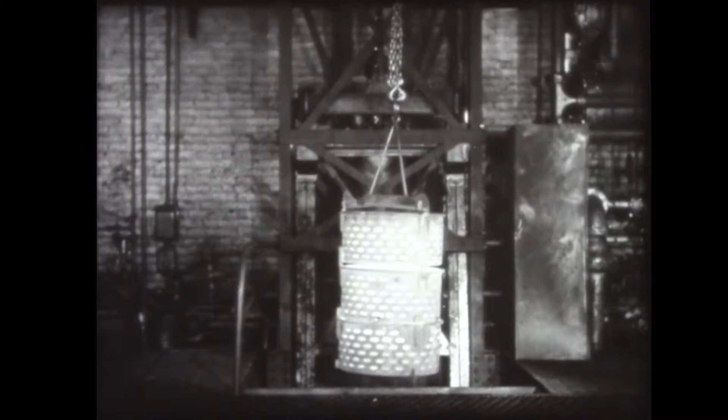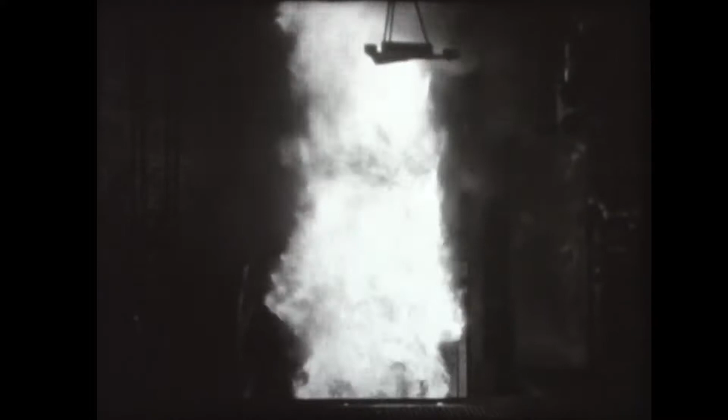Heat treatment makes possible the use of steel for a wide variety of modern industrial purposes. In the heat treating shop, specific qualities are imparted to metal parts. They can be made harder, tougher, softer, given whatever special properties are needed during their manufacture or in their eventual performance. Steel may be hardened by heating it to a high temperature, high enough to make it red hot, and cooling it rapidly.

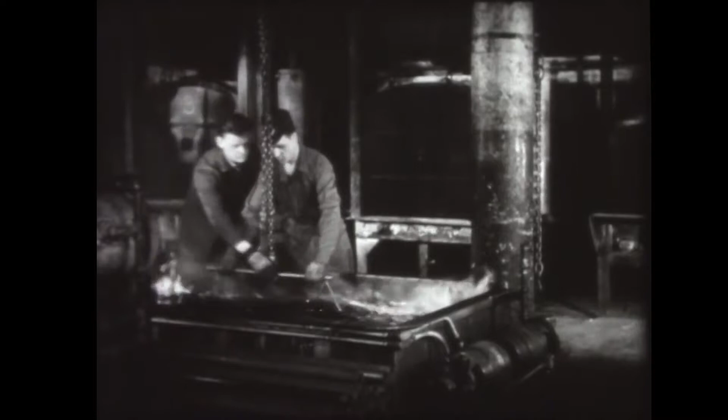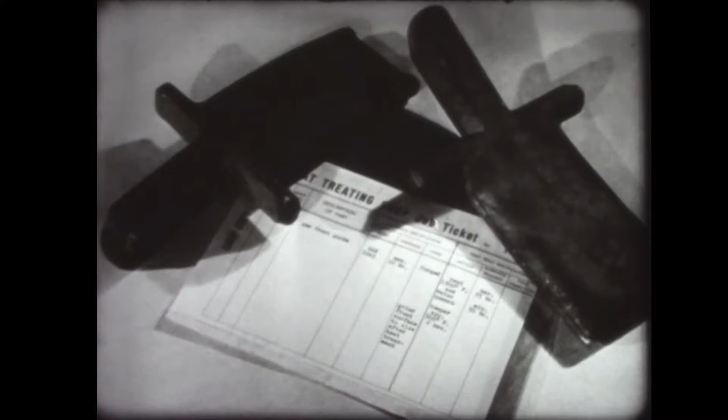Each job, each steel, has its own specifications. To take a typical case, these gun parts, called front guides, must be hard and tough to meet rigid performance demands. Heat treatment will impart the hardness required. But how hard are they now?

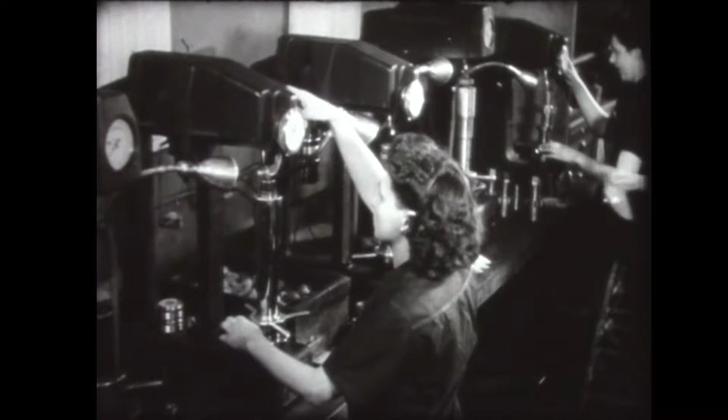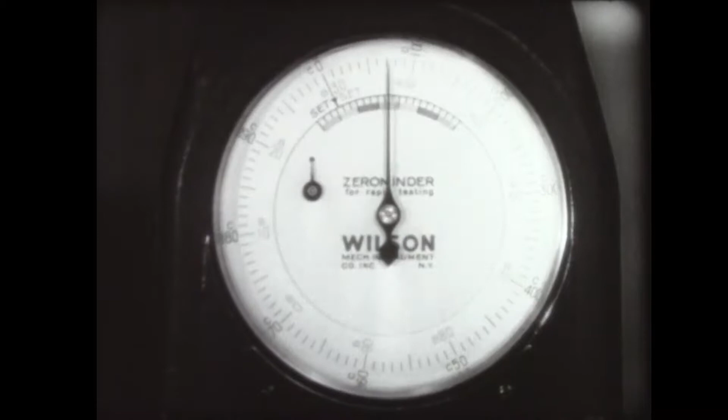The Rockwell hardness testing machine is an accurate means of finding relative hardness. The C scale of this Rockwell dial shows a reading of 10 to 11. The part under test isn't very hard. The specifications call for hardening it to Rockwell C 50 to 55.

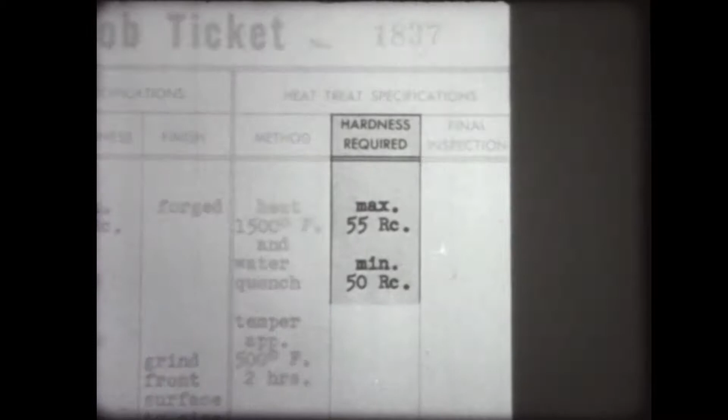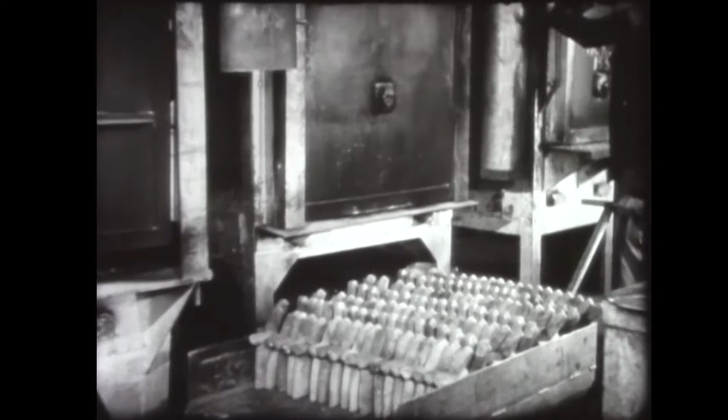These front guides are taken to the hardening furnace. Here begins the process which will bring about the desired final hardness and toughness. The guides are now the responsibility of the heat treater, who will see the job through. The furnace is charged with the parts and heated.

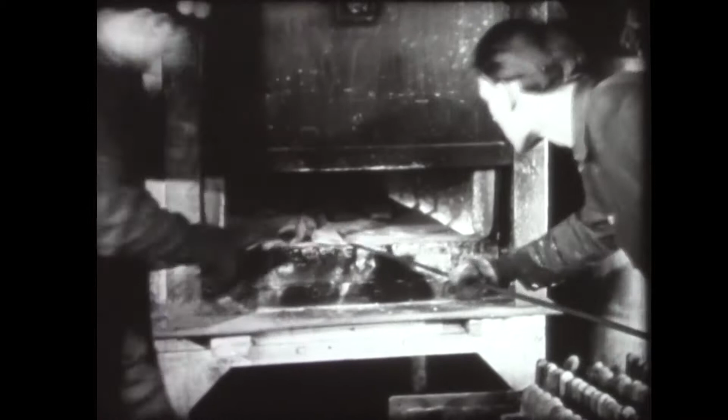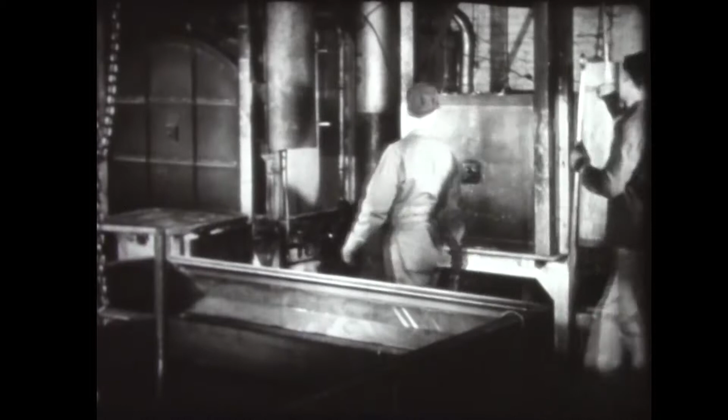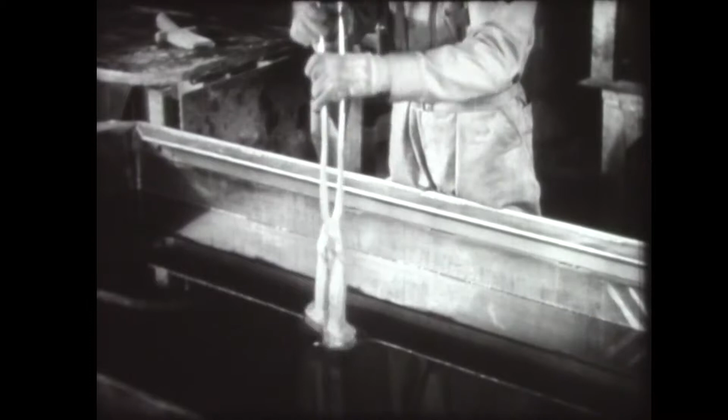On this instrument, called a pyrometer, the heat treater can read the temperature in the furnace. When the proper temperature is reached, 1500 degrees Fahrenheit in this case, the parts are removed from the furnace. They are quenched, cooled rapidly in water. Heating and quenching together produce desired changes in the properties of the steel.

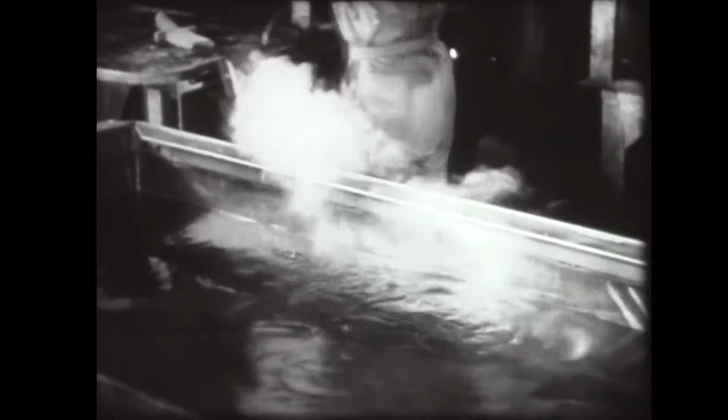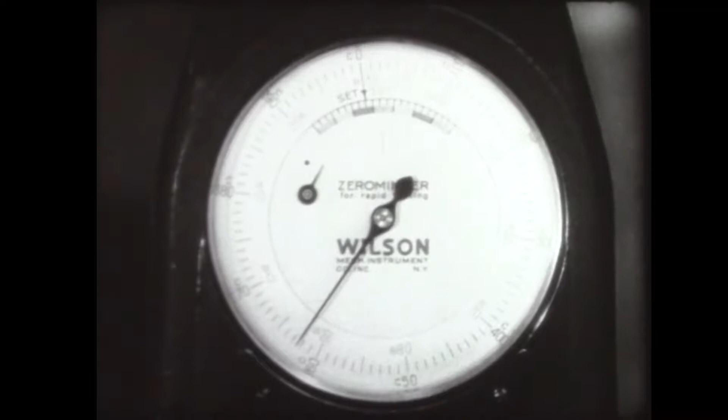After quenching, the heat treater again makes a Rockwell hardness test. The test reveals that the part has been hardened to about Rockwell C 62, 7 above the hardness called for. It has purposely been hardened to a point above specifications. Tempering, a toughening process, will bring the steel down to the exact required hardness.

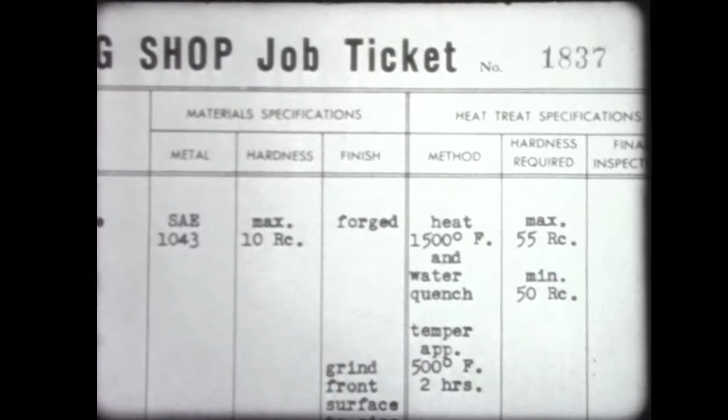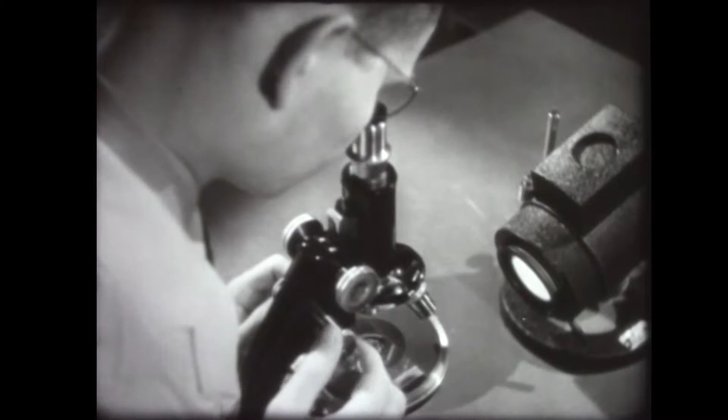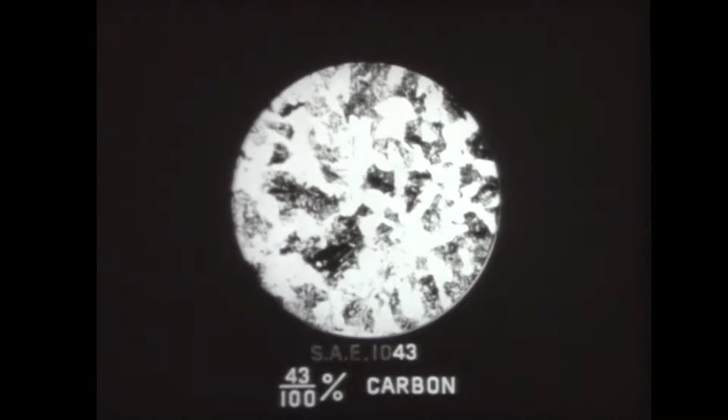This is an S.A.E. 1043 steel. S.A.E. means that the specifications of this steel are those of the Society of Automotive Engineers. 1043 is a numerical designation for this particular steel. It is a plain carbon steel containing 0.43% carbon by weight, a medium carbon content. This steel before heat treatment has a Rockwell C hardness of 10.

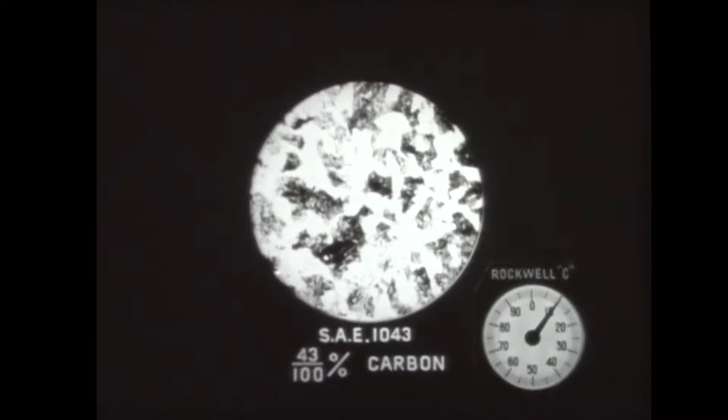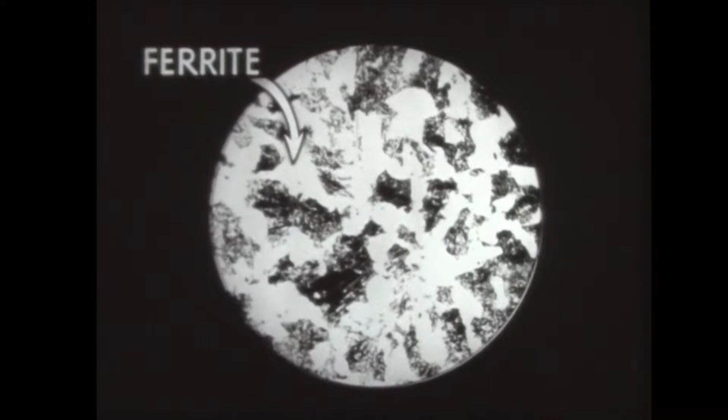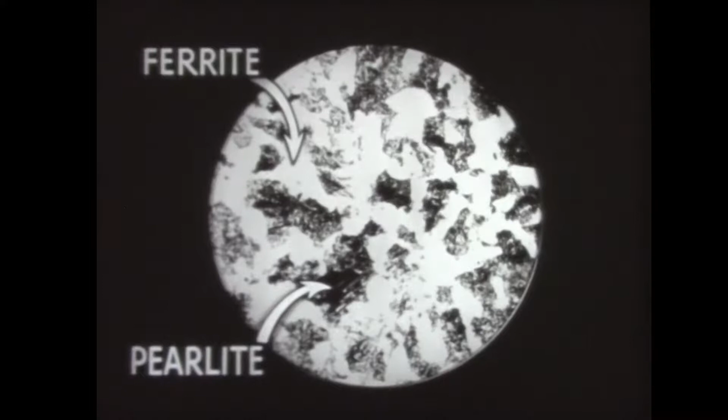Steel is composed of iron and carbon. In this micrograph, the lighter areas are called ferrite. Ferrite is iron. It contains an extremely small amount of carbon in solid solution, never more than 1/20%. The darker areas are called pearlite because of the lustrous mother-of-pearl appearance they sometimes present under the microscope. Pearlite contains practically all of the carbon present in the steel.

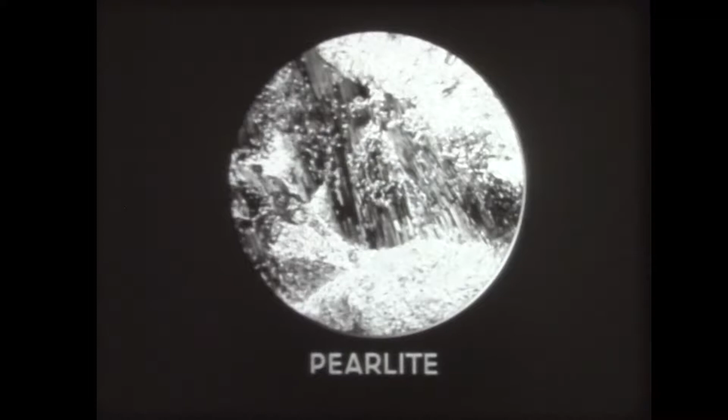Here's a micrograph showing well-defined pearlite. Pearlite is made up of alternate light layers of ferrite and dark layers of iron carbide. It is in the iron carbide layers that the carbon occurs. Ferrite and pearlite are both relatively soft. Under heat treatment, they both can be transformed into a new, hard substance.

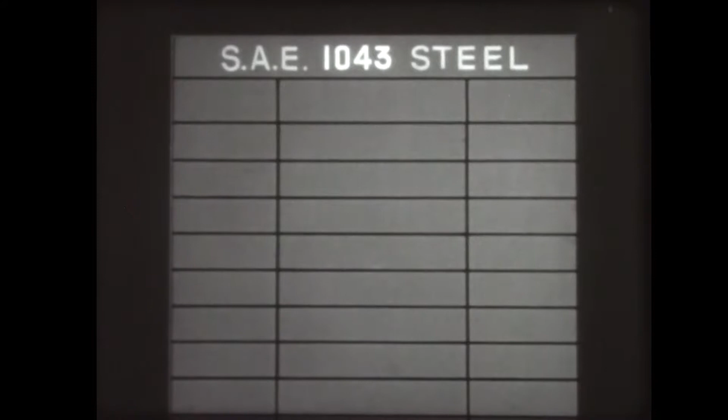On this table we shall record at progressive hardening stages the quenching temperature, the structural changes, and the Rockwell C hardness. We have seen that in its untreated condition, the structure of this steel consists of pearlite, graphically indicated here by light and dark layers, and ferrite, indicated by a white area. We also know that the steel's Rockwell C hardness is 10.

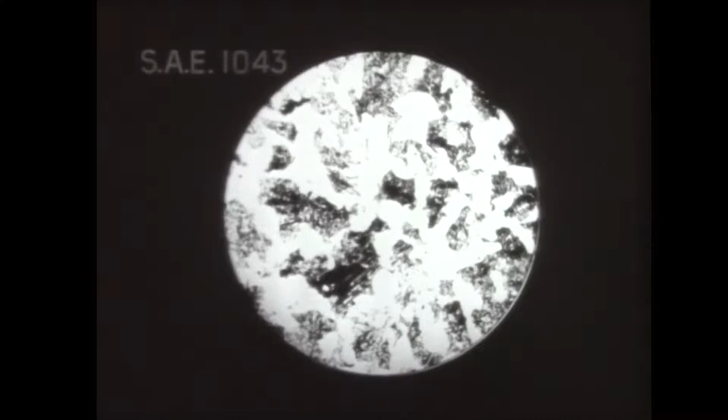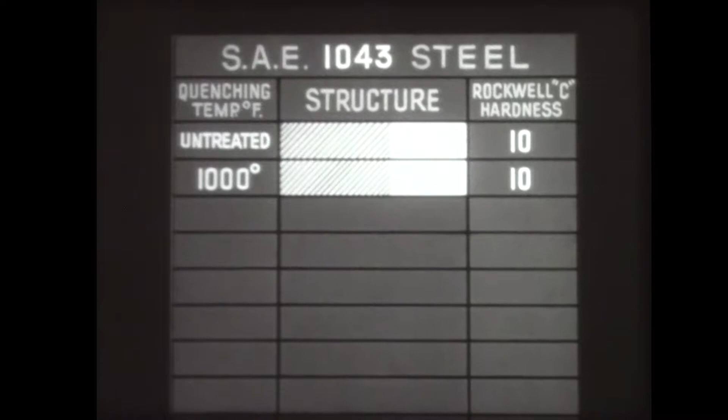Now assume that the steel is heated in a furnace to, say, 1,000 degrees Fahrenheit and quenched in water. A micrograph of the steel at that stage shows that no structural change has taken place. So we record that when quenched from 1,000 degrees, the structure remains unchanged. A Rockwell C test would show that the hardness remains at 10. In fact, no change occurs until the steel is heated to 1,320 degrees and quenched.

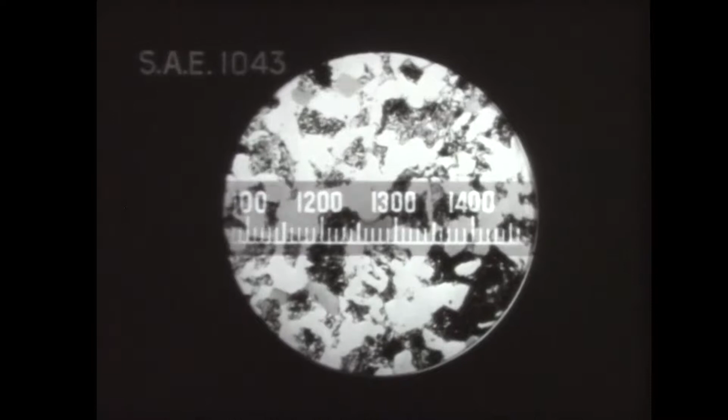Now small changes have taken place in the pearlite areas. In this micrograph, we can see that new areas, light gray in shade, have formed. What happened? Here is a graphic representation of the steel in its original condition. This represents its pearlite area, and this its ferrite area.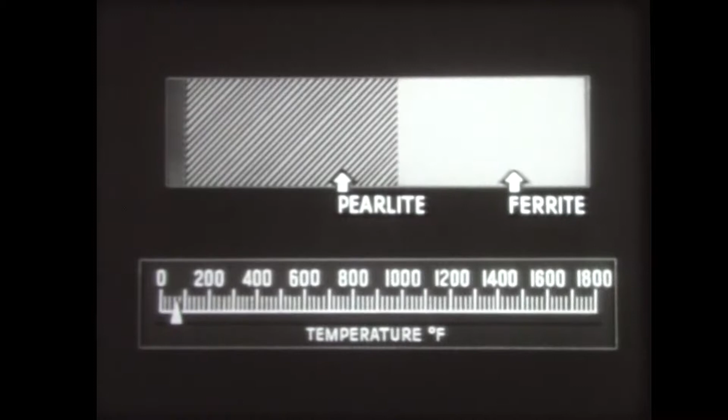When the steel attained a temperature of 1,320 degrees, some of the pearlite formed a new crystal structure, austenite. Austenite is a solid solution of carbon in iron. It is, however, a transitional substance. When the steel was quenched, the austenite, in rapid cooling, transformed to still another new substance, martensite.

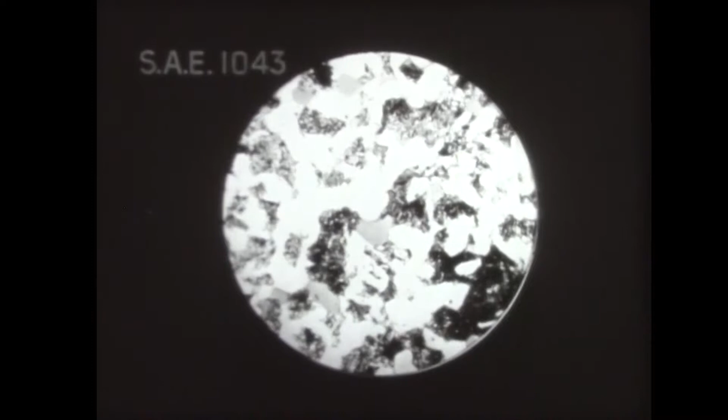The new light gray areas which appear in the micrograph are the martensite. Martensite is a very hard substance. Even the small amount now present in the steel is measurably harder. Its Rockwell C hardness is up to 19.

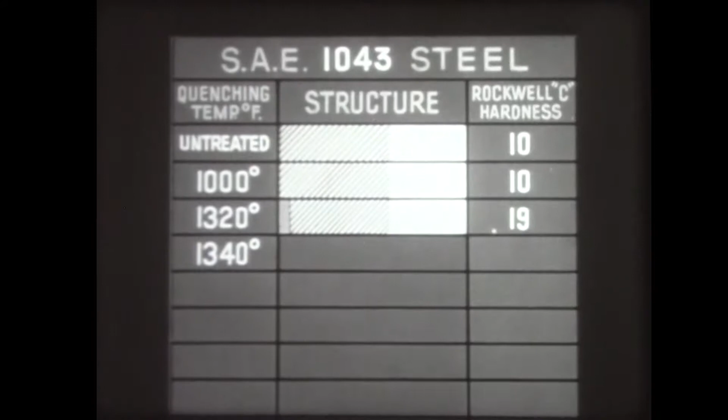Now let's heat the steel to 1,340 degrees. When quenched from this temperature, most of the pearlite changes to martensite. The original ferrite is still present. So the martensite area has increased. The additional martensite accounts for a rise in the steel's hardness, which is now 27.

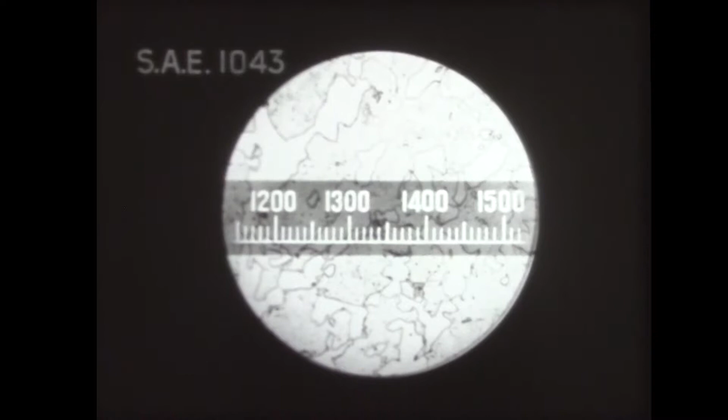What happens if the steel is brought up to, say, 1,380 degrees and quenched? Now all the pearlite has transformed to martensite. In addition, some of the ferrite has also changed to martensite. So, when quenched from 1,380 degrees, the steel is composed of martensite and ferrite, a structure which gives a strikingly increased hardness, 51.

When the steel is heated to 1,425 degrees and quenched, the micrograph shows that the structure has become almost all martensite. Only a little of the original ferrite is left. With its structure almost entirely martensitic, the steel is close to its maximum hardness. It is now 58.

When the steel is heated to 1,450 degrees and quenched, a wholly martensitic structure is achieved. This structure gives the highest hardness obtainable in this steel by this kind of heat treatment. Quenched from 1,450 degrees, its structure all martensite, the steel's hardness is 60.

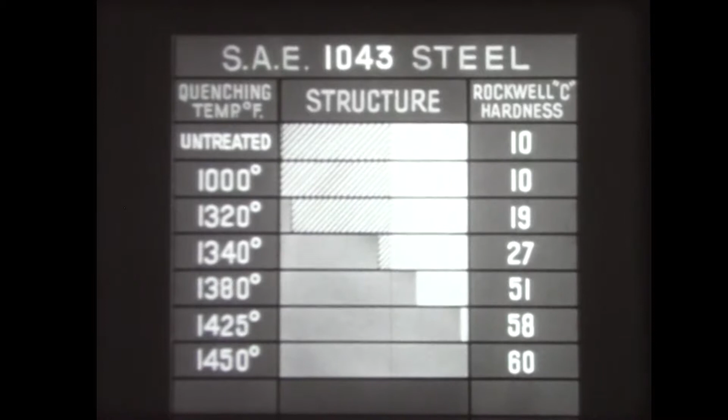This completes our record of the S.A.E. 1043 steel. Here is the point of initial hardening, 1,320 degrees. This is called the lower critical temperature, the quenching temperature below which this steel will not harden. It was marked by the first appearance of martensite in the structure of the steel.

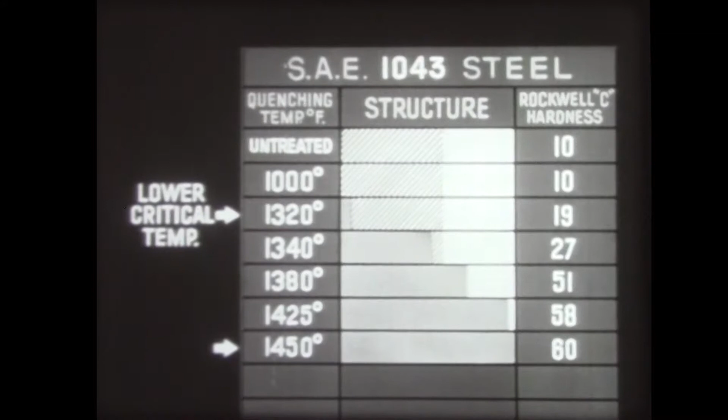Here is the point of maximum hardness, 1,450 degrees. This is called the upper critical temperature of the steel. It was reached when the steel became entirely martensitic.

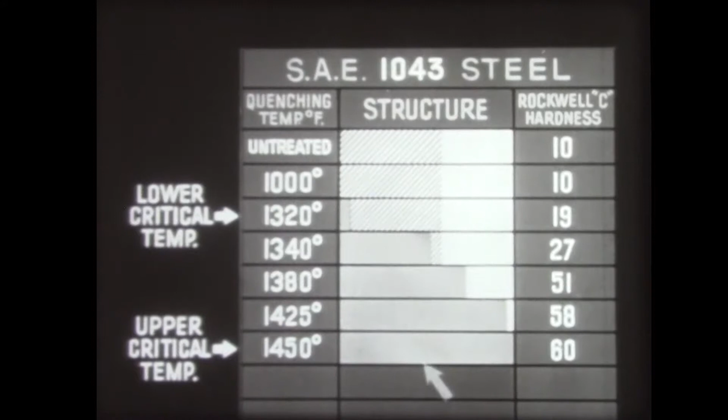Let's see what happens to a plain carbon steel of low carbon content under similar treatment. Here are a series of micrographs of such a steel at progressive stages of heat treatment. This is an S.A.E. 1013 steel. Its carbon content is 0.13%.

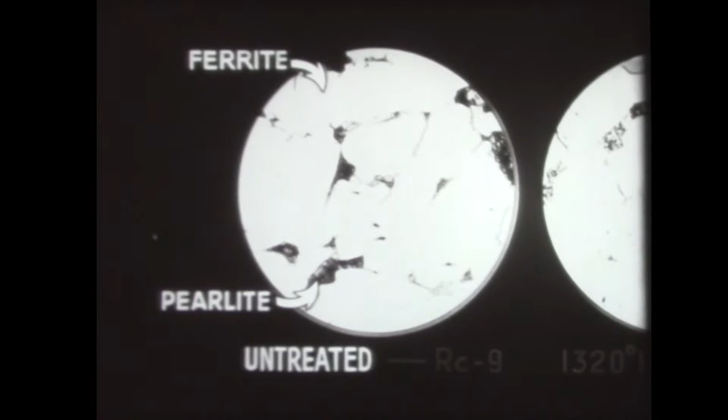This steel structure before hardening resembles that of the 1043 steel. It likewise consists of pearlite and ferrite. But being a lower carbon steel, it has less pearlite, the carbon-bearing constituent. Its Rockwell C hardness is 9.

The first structural change in this steel takes place when it is heated to 1,320 degrees and quenched. At this stage, some of the pearlite has formed martensite. Its hardness is 17. When quenched from 1,365 degrees, all the pearlite has disappeared, and it is composed of martensite and ferrite. Its hardness is 29.

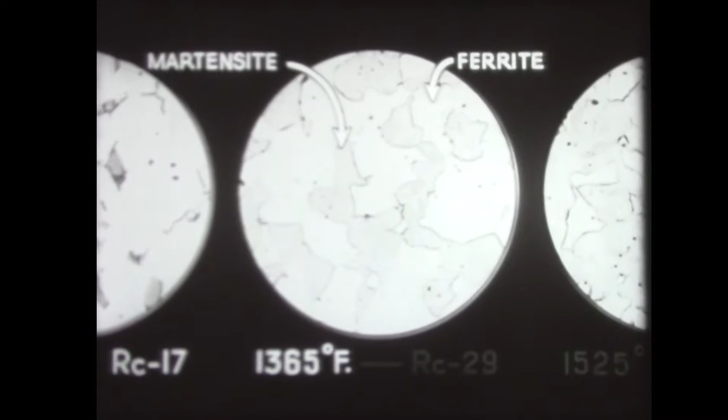After quenching from 1,525 degrees, there is more martensite, but still a substantial amount of ferrite. Its hardness is now 38. Not until it is quenched from 1,575 degrees do we get a micrograph that reveals a structure entirely martensitic. The Rockwell C reading is 45, the steel's maximum hardness.

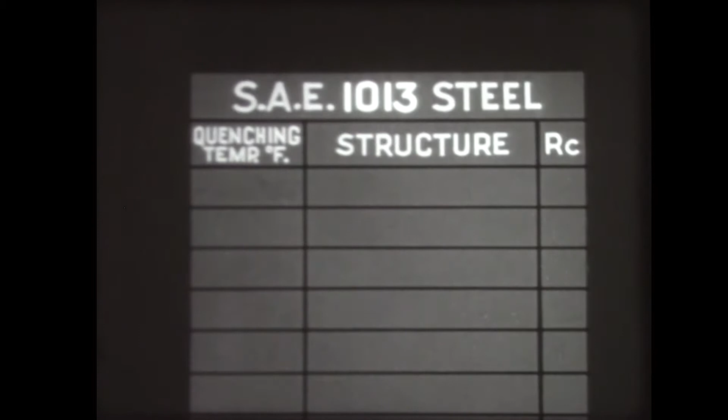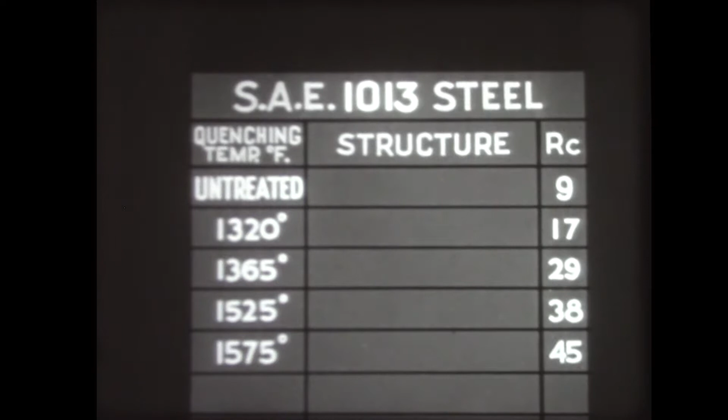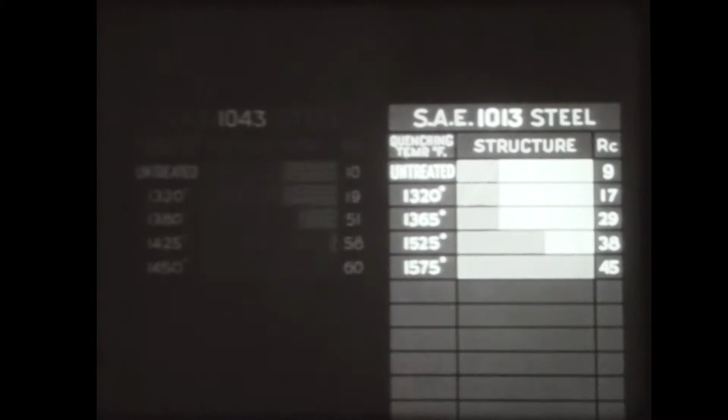Now we can record the changes in the 1013 steel, as it was quenched from increasingly higher temperatures. These are the Rockwell C values at the various stages. This column shows graphically the steel structure at each stage. The pattern of the change in structure is similar to that for the 1043 steel. The hardness of the 1013 steel increased with the increase in martensite, as did the hardness of the 1043 steel.

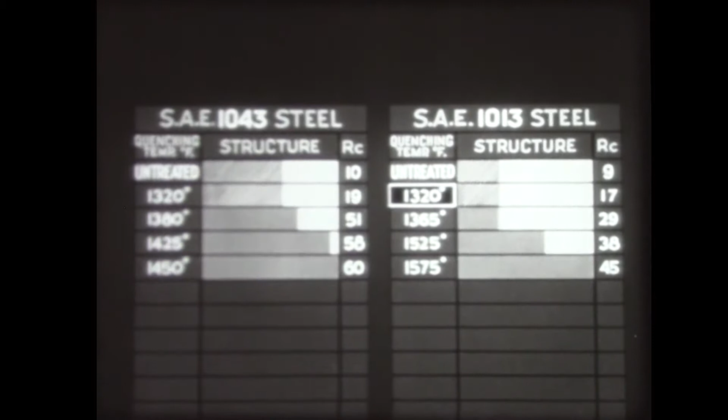Here is the point of initial hardening in the 1013 steel. 1,320 degrees Fahrenheit is its lower critical temperature, just as it was for the 1043 steel. Here is the point of maximum hardness for the 1013 steel. 1,575 degrees is its upper critical temperature. This is considerably higher than the upper critical temperature of the 1043 steel, which was fully hardened at 1,450 degrees.

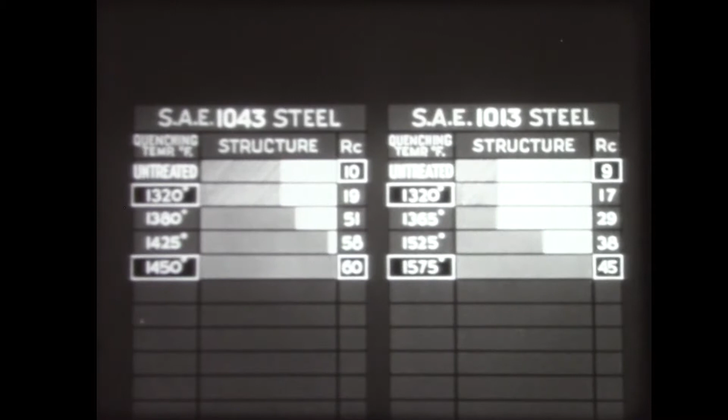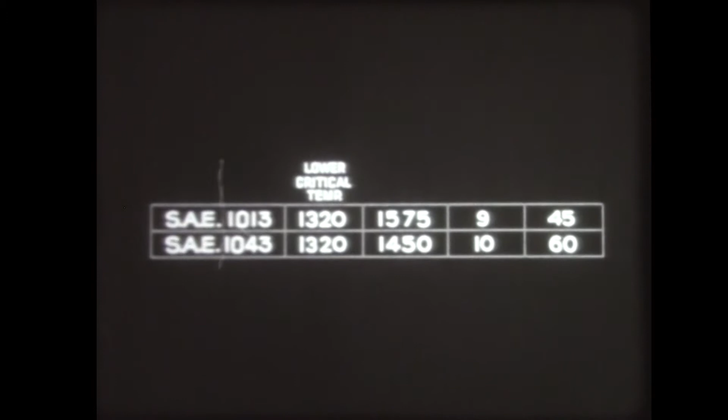Where the original hardness of the two steels was very close, 9 for the one and 10 for the other, the maximum hardness obtainable in the lower carbon steel, 45, is considerably less than that of the higher carbon steel, 60. These then are the values in which we are most interested: the lower critical temperature, the upper critical temperature, the original hardness, and the maximum hardness.

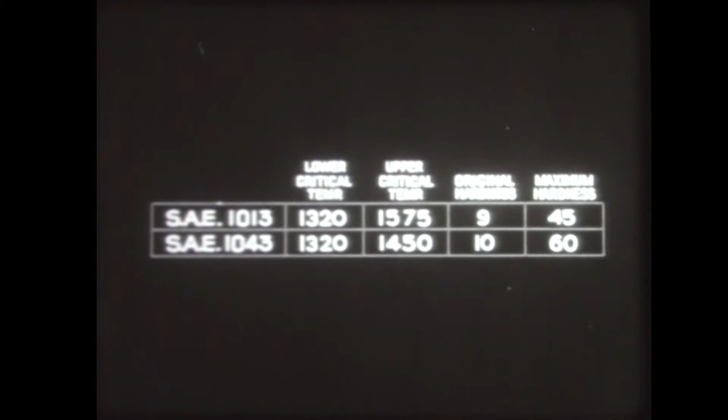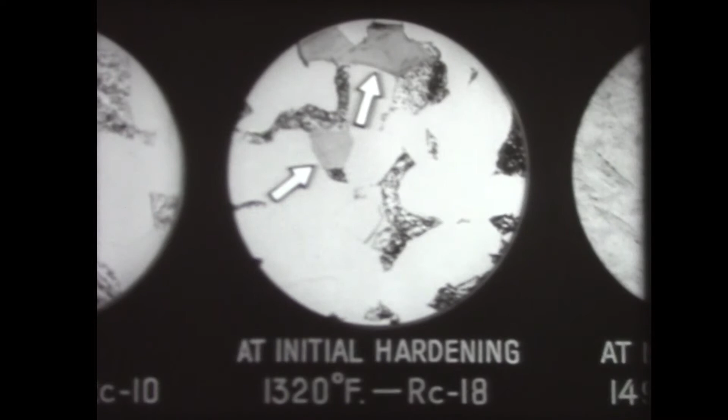Now let's check these findings against a third plain carbon steel with a carbon content between those of the two steels already observed. These micrographs are of an S.A.E. 1031 steel, containing 31/100ths of 1% carbon by weight. Here again, we find a similar pattern in the structural changes under heat treatment. In its unhardened state, this steel consists of pearlite and ferrite. At its point of initial hardening, martensite has replaced some of the pearlite. At maximum hardness, its structure is wholly martensitic.

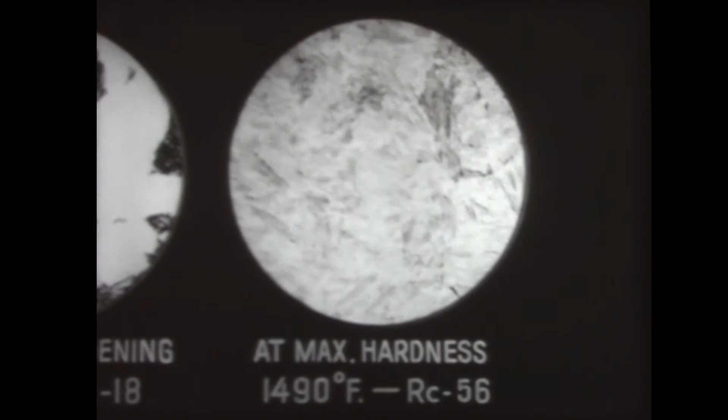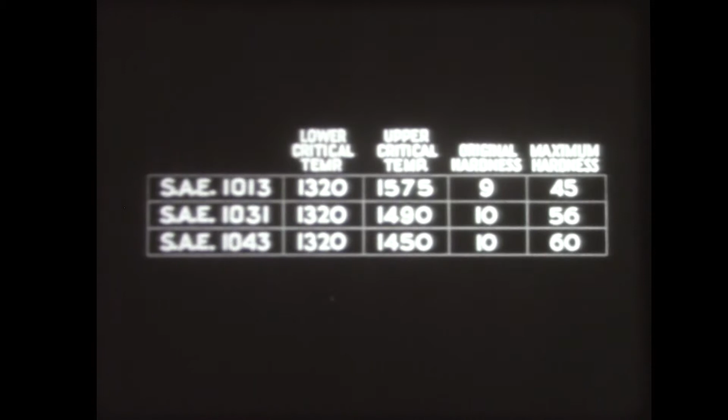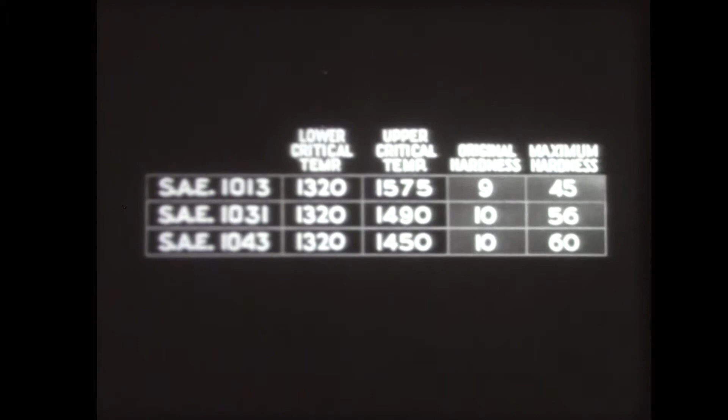And these are the comparative values. Lower critical temperature, 1,320 degrees. Upper critical temperature, 1,490 degrees. Original hardness, 10. Maximum hardness, 56. The first thing we can note from these data is that while before heat treatment, plain carbon steels vary only slightly in hardness, there is a wide range in their maximum hardness. And the higher the steel's carbon content, the higher is its maximum hardness.

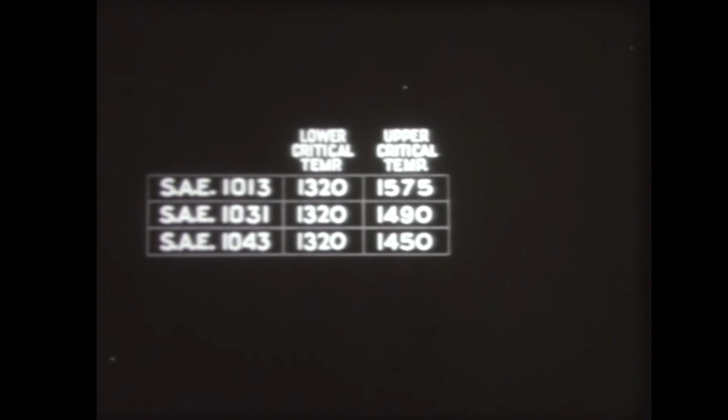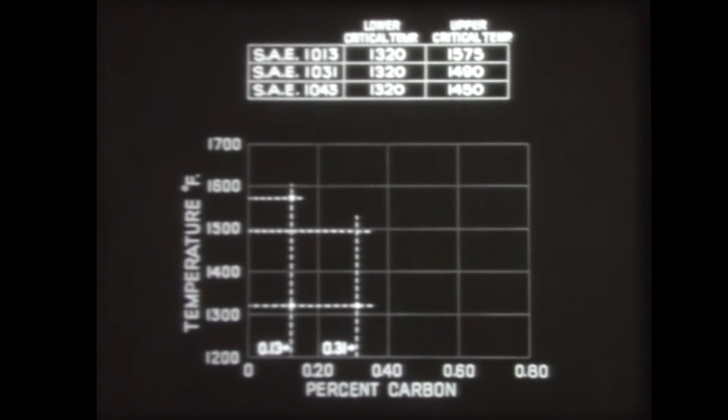From the data for these three steels, we can also project an iron-carbon diagram by plotting their carbon content and their critical temperatures. The 1013 steel has a lower critical temperature, the point of initial hardening, of 1,320 degrees, and an upper critical temperature, the point of complete hardening, of 1,575 degrees. The corresponding points for the 1031 steel are 1,320 and 1,490. For the 1043 steel, 1,320 and 1,450.

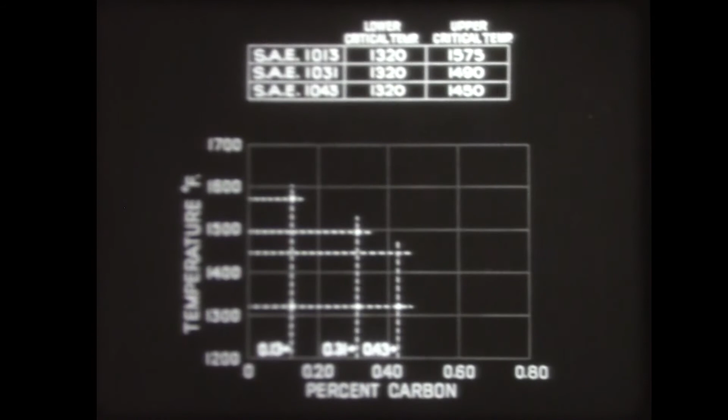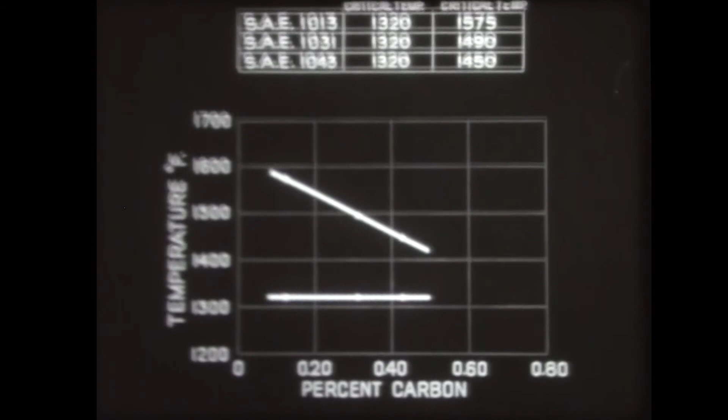Now draw a line through the 3 points of initial hardening and another line through the 3 points of complete hardening. The lower line, the lower critical temperature line, indicates that plain carbon steels begin to harden when quenched from about the same temperature, no matter what their carbon content. On the other hand, the upper line, the upper critical temperature line, shows that the lowest quenching temperature necessary to produce full hardening changes with the carbon content.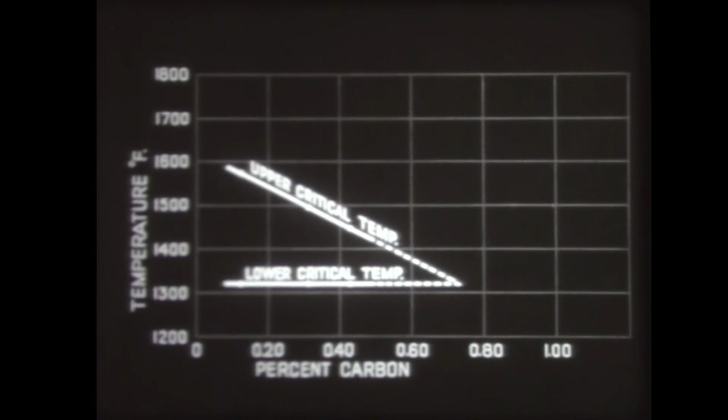If we carried these tests further with steels of higher carbon content, we would find that up to the point where the two lines meet, the higher the carbon content, the lower the quenching temperature at which full hardness is achieved. Beyond this point, somewhat different conditions prevail, and the higher the carbon content, the greater the heat needed to achieve full hardness. This simple iron-carbon diagram provides basic information necessary to a working knowledge of the hardening of steel by heat treatment.